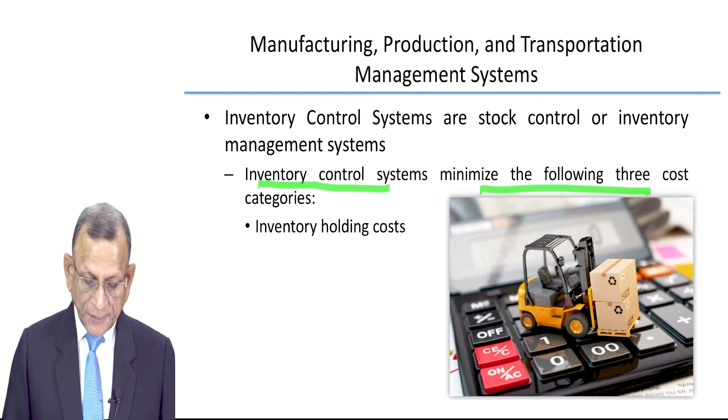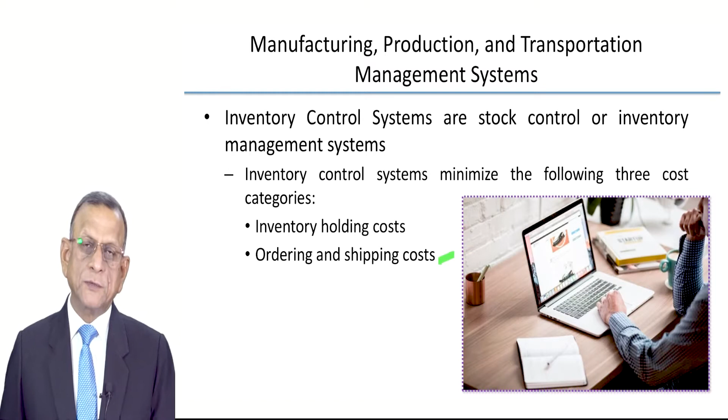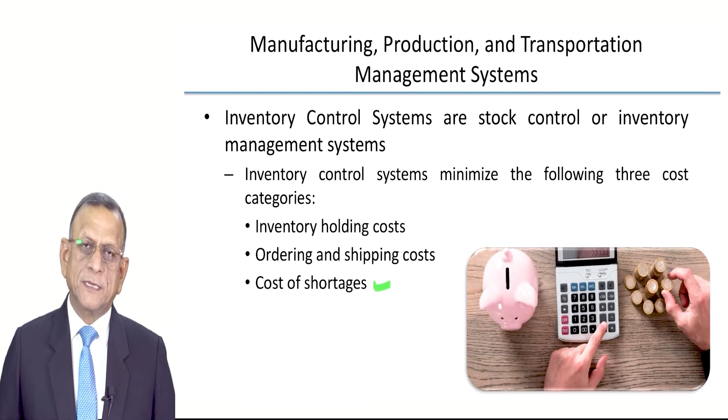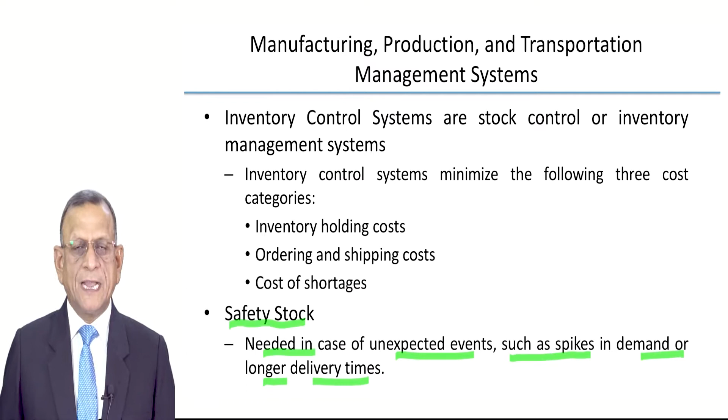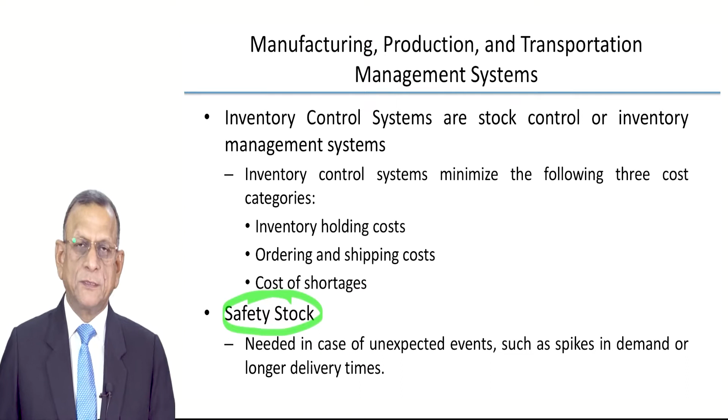I know that you have studied all such aspects in cost accounting or management accounting in some other paper. That's why we have something known as safety stock. What is safety stock? Safety stock is needed in case of unexpected events such as spikes in demand or longer delivery times. It's a seasonal thing, or all of a sudden something has erupted in the environment, and because of that you have extraordinary demand for a particular thing. So you should have safety stock, so that you are able to handle this situation.

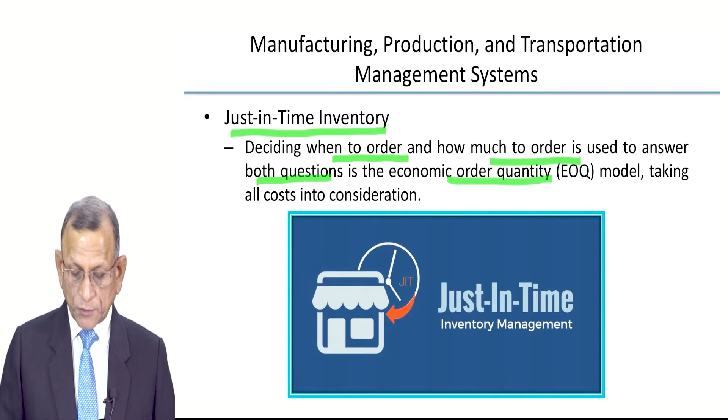We have another term in inventory management known as just-in-time inventory. What is just-in-time? Deciding when to order and how much to order; both questions are answered in the economic order quantity model, taking all costs into consideration. JIT inventory management attempts to minimize holding cost, meaning that whenever I need something, at that very moment, the thing should be delivered to me. I need this raw material right now, and at that very moment the raw material will reach my factory. This is just in time, by not taking possession of inventory until it is needed in the production process.

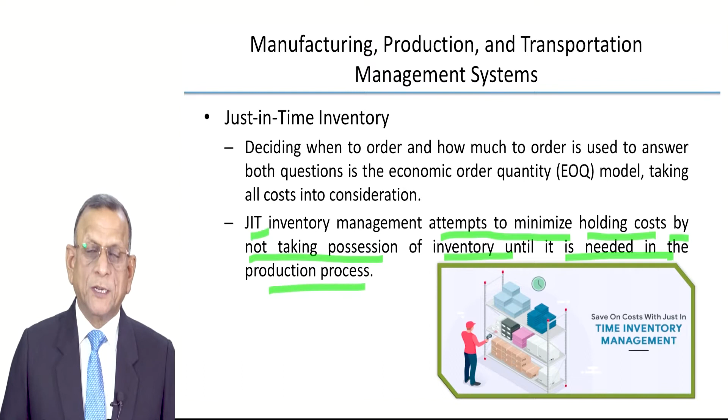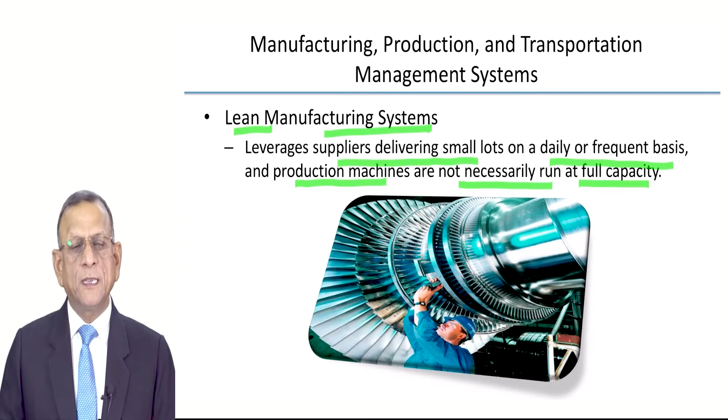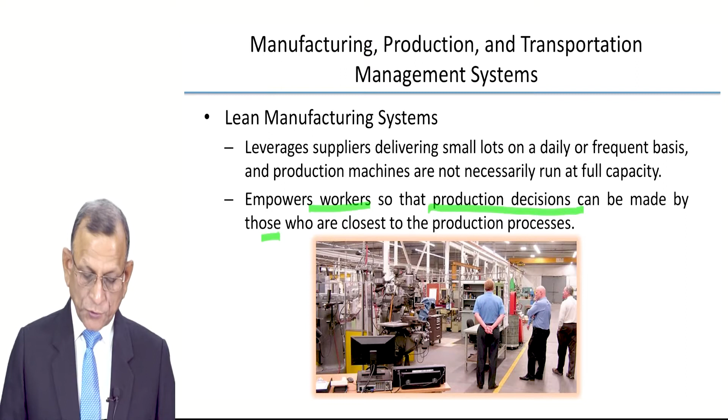This leads to something known as lean manufacturing systems. This leverages suppliers delivering small lots on a daily or frequent basis, that is JIT, and production machines are not necessarily run at full capacity. I need to produce only this much, so I'll place the order for the raw material for this much production only. Unnecessary production is not happening. Unnecessary raw material is not being procured. This all is lean manufacturing. It empowers workers so that production decisions can be made by those who are closest to the production processes.

Then friends, whatever is being produced should be checked. For this we have QC, quality control systems, standalone or part of an enterprise-wide TQM, total quality management effort, for providing data about the quality of incoming materials or parts as well as the quality of in-process semi-finished and finished products. If you want good quality output, you should have good quality input and good quality processing. So TQM should get activated the moment the order for raw material is placed, then when it is received, when it is processed, and when the finished goods are produced by the machines or received by the warehouse.

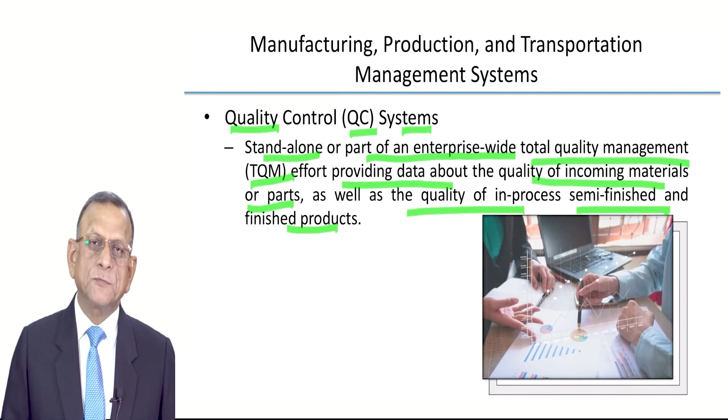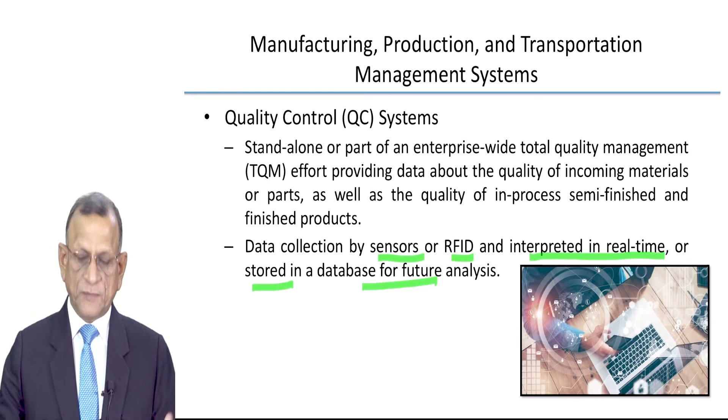So data is collected by sensors or RFID and interpreted in real time or stored in the database for future analysis. This should happen on a real time basis. It should not be treated as a post-mortem, that the thing has happened and now you are doing TQM activity. If after production you are checking the quality, then the whole batch of production will go waste. So friends, for this we may use CIM, Computer Integrated Manufacturing. Everything is controlled and managed with the help of CIM.

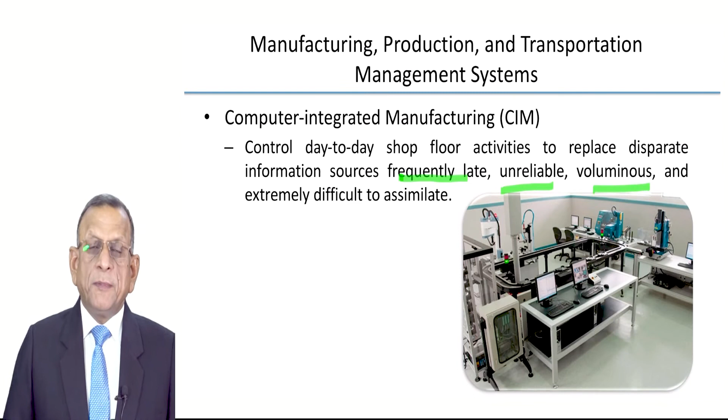Computer Integrated Manufacturing helps us to control day-to-day shop floor activities. Shop floor means factory. It replaces disparate information sources, frequently late, unreliable, voluminous, and extremely difficult to assimilate. If the information is not captured at the very place where production is happening, then we will be late to take a call. So, without delay, reliable, not voluminous: whenever it's happening, let me capture the data and start assimilating. So, for this we have Computer Integrated Manufacturing.

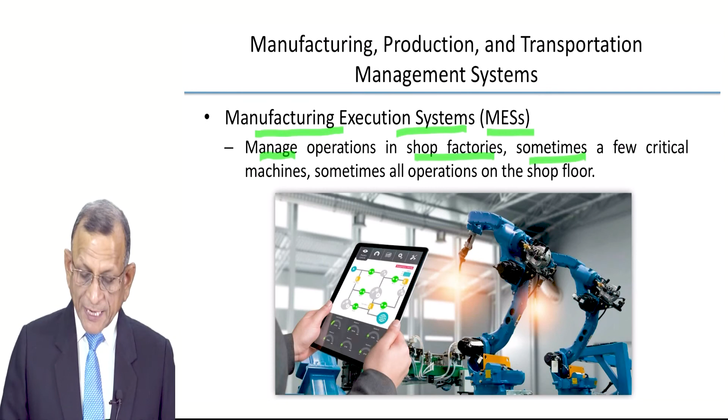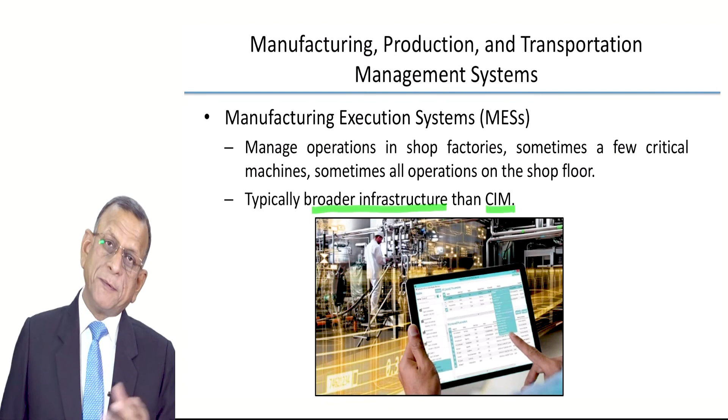One part of this is Manufacturing Execution Systems, MES. Friends, in different books or organizations you may find different nomenclature, but that doesn't matter. Manufacturing Execution Systems manage operations in factories, sometimes a few critical machines, sometimes all operations on the shop floor. Typically, a broader infrastructure than CIM. At times it may be a part of CIM, at times CIM may be a part of it. It depends upon the way in which you perceive it.

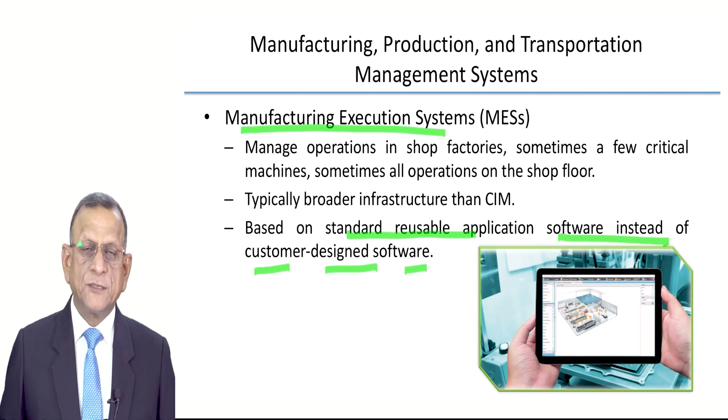It is based on standard reusable application software instead of custom-designed software. This is something new for us. In manufacturing execution systems, you have readily available modules, and you use such integrated modules so that it works in a perfect manner. So with the help of readily available small software, we may create it. We may also have FMS, Flexible Manufacturing Systems. They can accommodate manufacturing of different parts at different volumes.

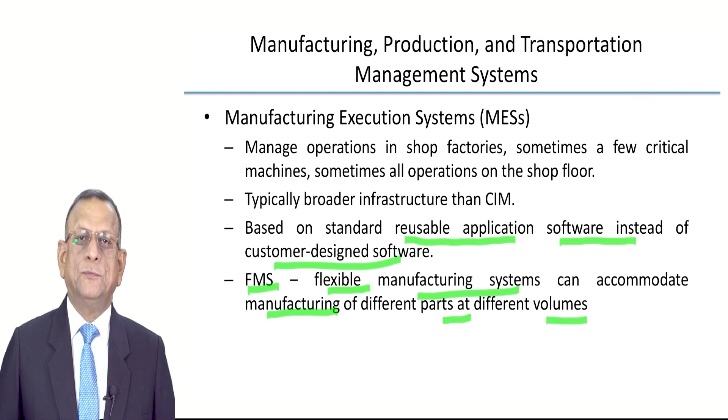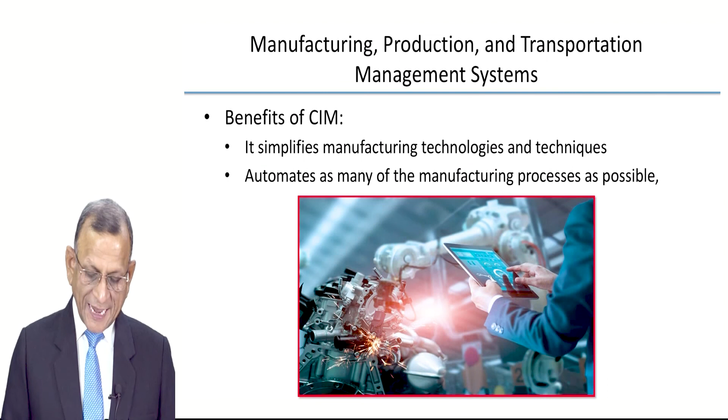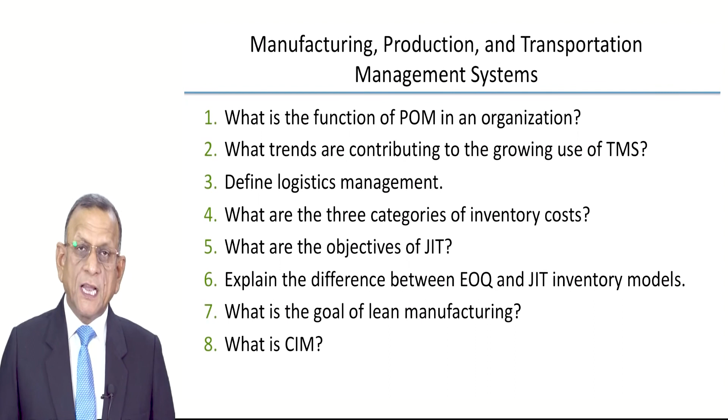What are the benefits of CIM? It simplifies manufacturing technologies and techniques. It automates as many of the manufacturing processes as possible. It integrates and coordinates all aspects of design, manufacturing and related functions. And then friends, at the end of this section, we have questions.